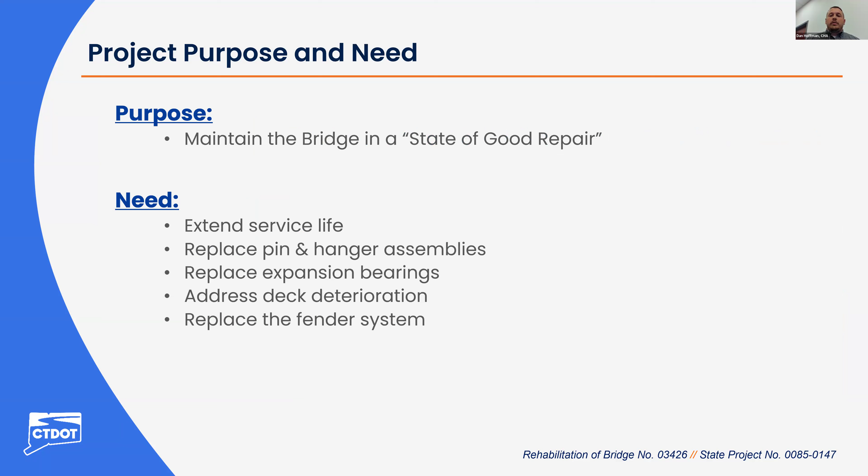So the purpose of this project is to maintain the bridge in a state of good repair. The project needs include extending the service life, replacing the pin and hanger assemblies, replacing the expansion bearings, addressing deck deterioration, and replacing the fender system.

The bridge for the project location, bridge number 03426, the Mohegan-Pequot Bridge, carries Route 2A eastbound and westbound over the New England Central Railroad, P&W Railroad, and the Thames River in Montville and Preston. The bridge carries one lane of traffic in each direction between Route 32 on the Montville side and Route 12 on the Preston side. Mohegan Sun Casino is located just to the northwest of the bridge.

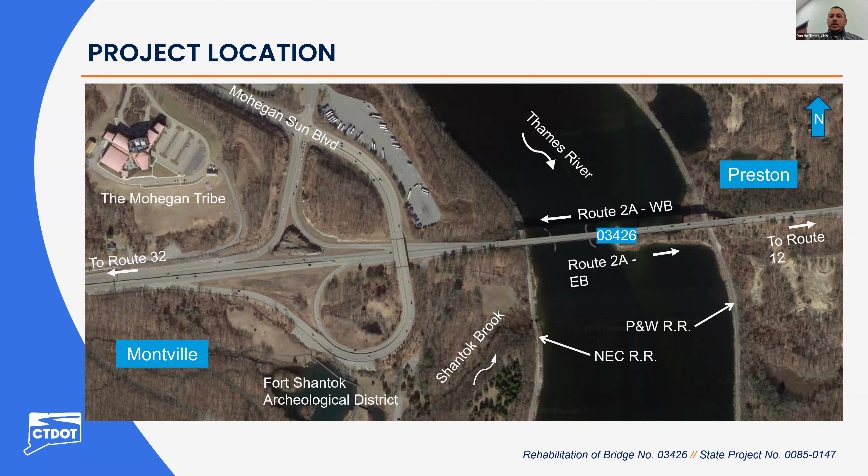The bridge was built in 1967. In 1985, the pin and hanger assemblies were retrofitted with emergency bearing supports. In 1996, a rehabilitation was performed, which included full blast clean and paint, new protective fence, new light standards, and repairs to the substructure. In 2010, the strip seal expansion joints were replaced with asphaltic plugs, and some deck patching was performed within those limits.

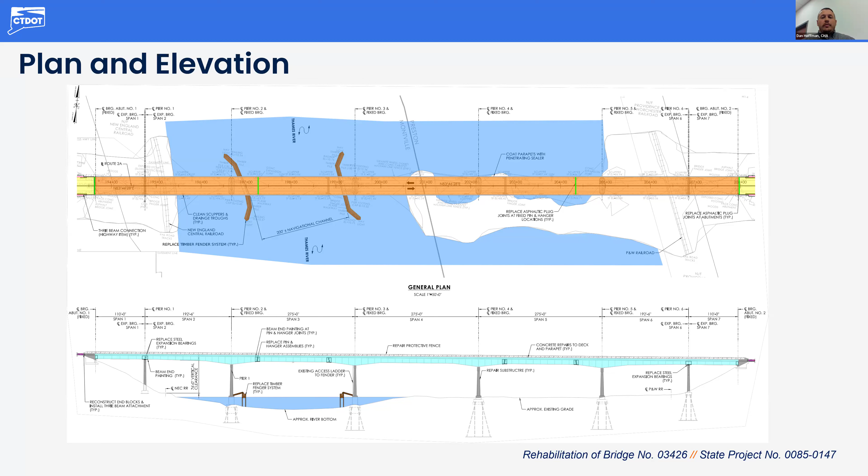So here's a colored plan and elevation view of the Mohegan-Pequot Bridge. The bridge is a 7-span structure comprised of a concrete deck supported by 4 welded steel plate girders. It is approximately 1,434 feet long. Spans 1 and 7 are simple spans. Spans 2 through 6 are continuous over the piers. The pin and hangers are in spans 3 and 5. The navigation channel is located between piers 2 and 3 and protected with a timber fender system.

This view shows a cross-section of the bridge. Route 2A carries a single lane of traffic in each direction. Each lane is 12 feet wide with 8-foot shoulders throughout the length of the bridge. The bridge has a curb-to-curb width of 40 feet and an overall out-to-out width of 43 feet 6 inches.

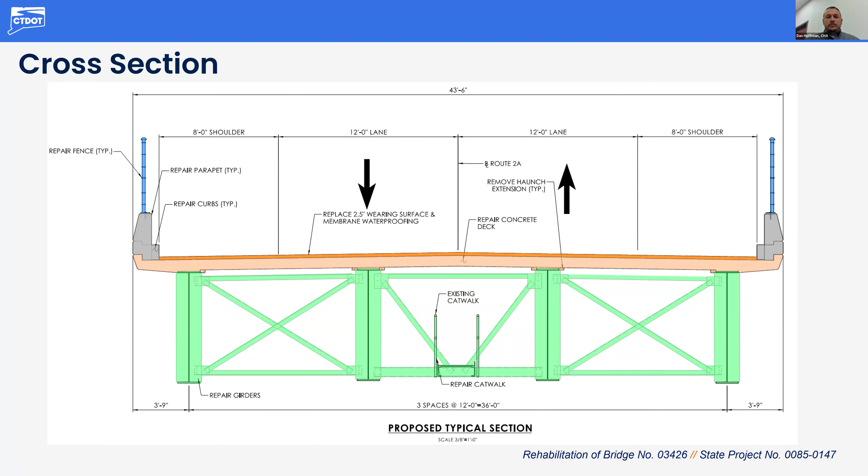So before getting into the existing conditions, I thought it'd be helpful to note how condition ratings are determined and the purpose of them. So per the Connecticut Bridge Inspection Manual, condition rating is a judgment of a bridge component condition in comparison to its original as-built condition, and it's used to provide an overall characterization of the general condition of the component being rated. So condition ratings are assigned a numerical value, each indicating a different condition as shown in the table.

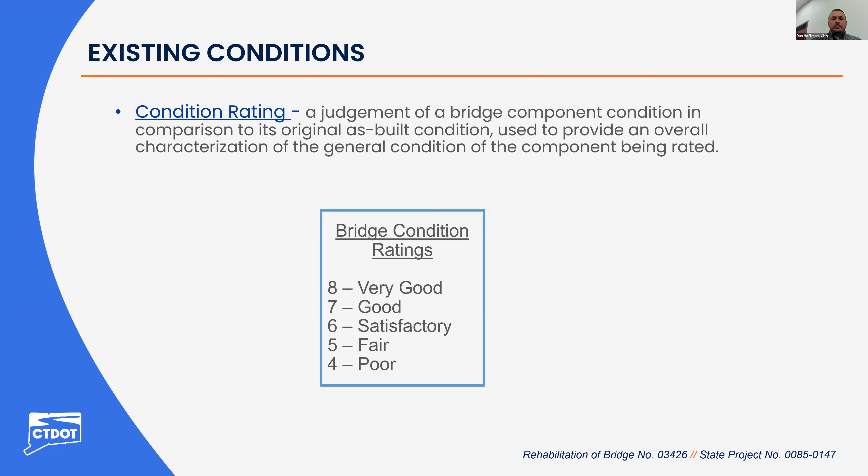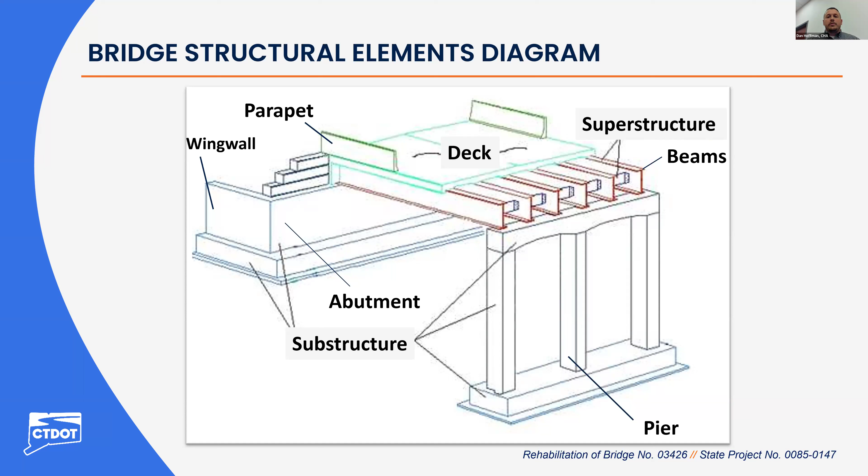And also to help clarify the elements of the bridge, we have included this graphic. So the deck is the surface that you drive on. The parapets are the safety barriers on the edge of the deck. The deck is supported by beams, and this makes up the superstructure of the bridge. The substructure is what supports the superstructure from below. This consists of abutments with wing walls at the ends of the bridge and piers located as needed to provide intermediate supports.

So next, I'll go over the existing conditions of the Mohegan-Pequot Bridge. So for the deck, overall, the deck is noted to be in fair condition. The underside of the deck exhibits spalls with exposed rebar, hollow areas, and cracking. The underside of the deck is approximately 13% deterioration per the inspection report. A ground penetrating radar, GPR, evaluation was performed by Infrasense, which shows approximately 20% of the deck deterioration.

Existing deck joints are in fair condition. There are deck joints at abutments 1 and 2, piers 1 and 6, and at the pin and hangers within spans 3 and 5. Asphaltic plug joints are located at both abutments and were replaced in 2021 when the bridge was last paved and have no noticeable deficiencies. The joints at the fixed pin and hangers in spans 3 and 5 are pourable joint seals with elastomeric headers installed in 2015. These joints are slightly depressed and have random hairline cracks in the elastomeric headers.

Steel finger joints are located at piers 1 and 6 and at the expansion pin and hangers in spans 3 and 5 and are original to the structure. There are hairline cracks in the concrete headers, vertical misalignment between the joint fingers up to 3/8 of an inch, and some section loss in the joint fingers at the curb line. The vertical joint plates at the ends of the deck have some laminated rust and section loss.

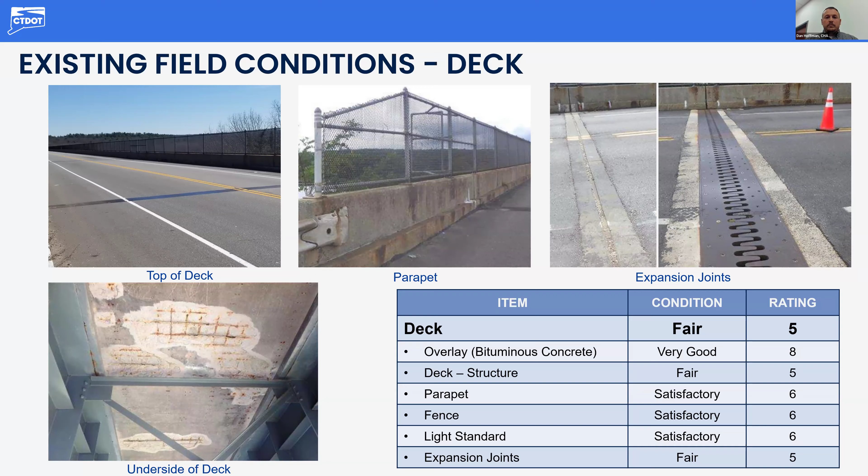So for the approaches, overall, the approaches are in very good condition. There are no approach slabs per the existing plans. The approach guide rail exhibits some random impact damage and bent or twisted posts. All approach guide rail and bridge attachments appear to meet RI or RB standards. The guide rail and bridge attachments do not meet the latest ConnDOT standards and are not MASH compliant.

For the superstructure, overall, the superstructure is in fair condition. The bearings are in poor condition. The bearings consist of steel fixed and expansion rocker bearings. Expansion rocker bearings at piers 1 and 6 exhibit painted over pitting with reoccurring laminated rust, pack rust between bearing components, and up to 75% section loss in anchor bolt nuts. Some bearings are overexpanded while some bearings are overcontracted.

Fixed bearings at the abutments and piers 2 through 5 exhibit pack rust between sole plates and girder bottom flanges, and up to 20% section loss in anchor bolt nuts, mainly at the abutments. Pot bearings are present at the pin and hanger emergency bearing support locations.

The girders are in fair condition, with the paint being in good condition. The girders exhibit less than 5% paint deterioration, isolated areas of painted over steel section loss. The pin and hangers are located in spans 3 and 5. The hangers have scattered pitting up to 1/8 inch deep. The control plates have up to 3/16 inch deep section loss and are typically bowed from pack rust between the girder webs and/or the elastomeric spacers. At isolated locations, the control plates are in contact with the web or loose with abrasion rust.

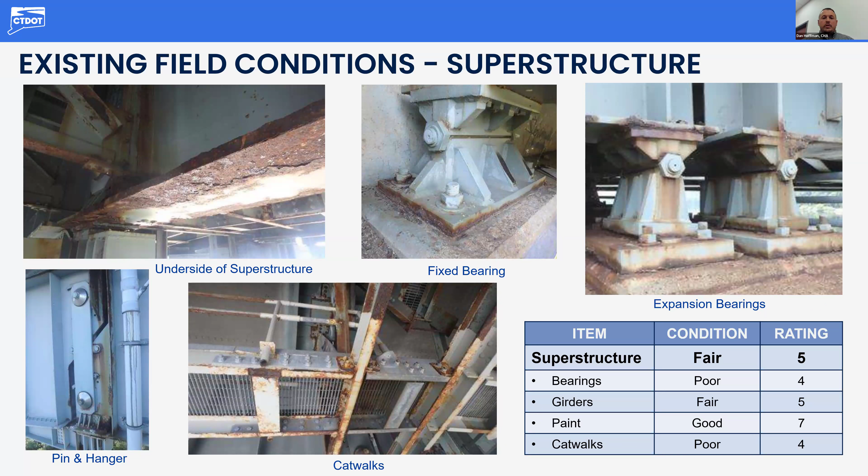So for the substructure, overall the substructure is in satisfactory condition. The substructure consists of reinforced concrete abutments and piers with stone masonry facing on the footing caps of the river piers. The concrete abutments exhibit hairline cracks, hollow areas, and spalls. The pier columns have random vertical and hairline cracks with isolated efflorescence and rust. Pier columns have isolated locations with hollow areas.

The pier caps have random vertical and hairline map cracks with isolated efflorescence. Pier caps have scattered concrete patches with hollow areas on the underside up to full length and width at piers 1 and 6. Underwater, the stone masonry facades have isolated areas of mortar loss.

Erosion is rated a 5 due to erosion in front of abutment 2 along the slope. It's up to 3 feet deep with exposed footing up to 1 foot high. That's at abutment 2. Areas of erosion are also present along the wing walls, up to 10 feet long, 3 feet wide, and 1 foot deep. Scour is rated a 6 with channel bottom areas of aggradation and degradation at the piers between inspections.

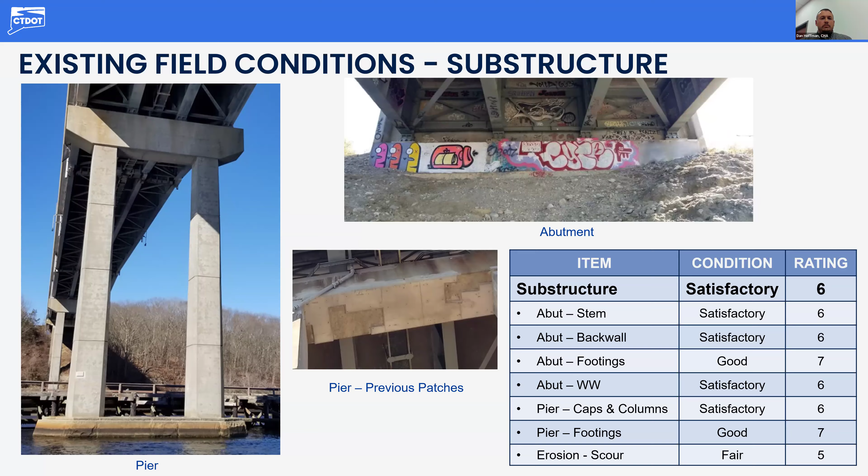So for the channel and channel protection, overall, the channel and channel protection is in fair condition. This is mostly driven by the fender system condition. There are areas of aggradation and areas of degradation within the channel between inspection reports. Piers 2 and 3 have portions of the footing exposed intermittently up to 4.7 feet high around the perimeter. However, the underwater concrete portion of the footing extends an additional 14 feet below the bottom of footing area.

So the existing fender system is in poor condition. The fender system is located alongside piers 2 and 3 on either side of the navigation channel. Deteriorations include loose or missing connection hardware, heavy checking and splits, severe rot, section losses, and teredo damage to the piles.

So as I stated before, the purpose of this project is to maintain a state of good repair. The project needs include extending the service life, replacing the pin and hanger assemblies, replacing expansion bearings, addressing deck deterioration, and replacing the fender system.

So the major scope of work items include repairs to the structural steel members, including the catwalks, replacing the pin and hanger assemblies with stainless steel components and non-metallic bushings, replacing the wearing surface and membrane waterproofing, replacing the asphaltic plug joints and the joints at the fixed pin and hangers, repairing the concrete deck, parapets, and curbs, removing the haunch extensions over the railroad and waterway,

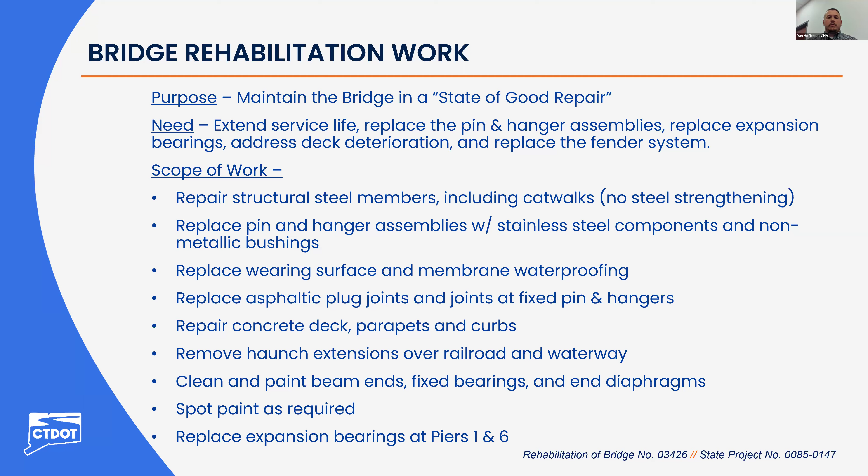cleaning and painting beam ends, the fixed bearings and end diaphragms, spot painting as required elsewhere, replacing the expansion bearings at piers 1 and 6, repairing the concrete substructure, replacing the fender system with a timber replacement, installing slope protection to address the erosion at abutment 2, upgrading the end block transitions to be MASH compliant with MASH compliant guide rail attachments, partial replacement of the approach guide rail and curbing, some minor full depth shoulder reconstruction and approach

milling and overlay, repairing the fence on the parapets and replacing the fence fabric over the railroads, fixing broken weep pipes, extending some weep pipes, cleaning drainage scuppers and removing vegetation from drainage troughs, replacing cracked missing junction box covers and light standard handhole covers, applying a penetrating sealer to the concrete surfaces, and cleaning graffiti.

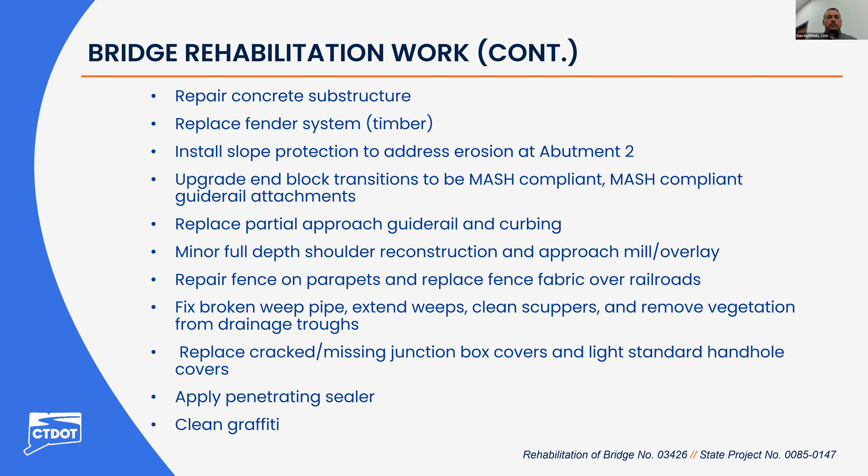So next I'll discuss some additional information on the existing condition and some of the proposed repairs of a few of the scope items. So the existing steel girders are in fair condition, exhibiting deterioration, including peeling paint, light to moderate rust, laminated rust, and section loss. So proposed would be steel repair plates. There are currently approximately 20 areas of concern that would require steel repairs, not counting the catwalk. This is on the girders. Repairs will include web and stiffener and bottom flange repairs, and also required other repairs to the existing catwalk.

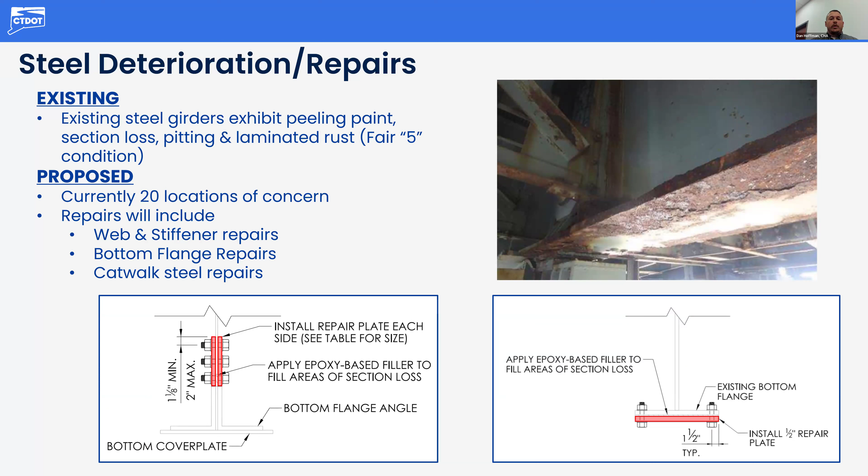So the existing expansion bearings. The existing expansion rocker bearings at piers 1 and 6 exhibit painted over pitting up to 1/4 inch with recurring laminated rust, pack rust up to 3/8 inch between bearing components, and up to 75% section loss on the anchor bolt nuts. Some bearings are overexpanded and some bearings are overcontracted. So proposed will be to replace the steel expansion bearings with high load multi-rotational disc bearings. This will require jacking up the girders to remove the existing bearings and then installing the new bearings.

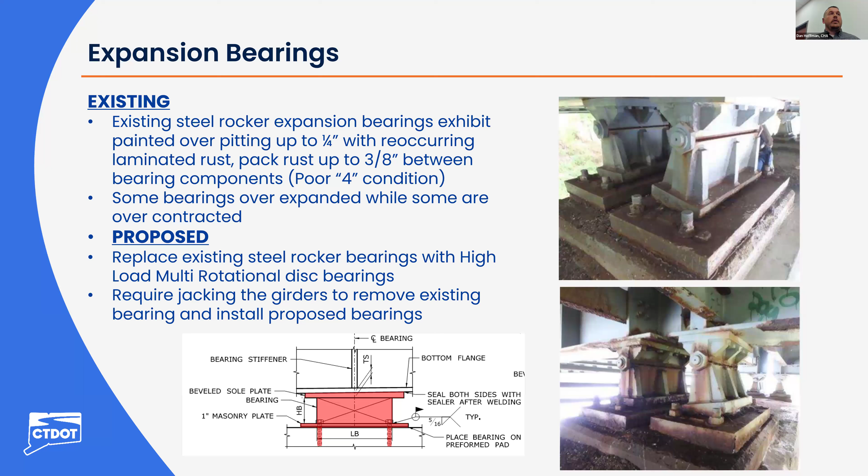So the pin and hanger assemblies, located in spans 3 and 5. The hangers have scattered pitting up to 1/8 inch depth. Control plates have up to 3/16 deep section loss and are typically bowed up to 3/4 inch with pack rust between the girder webs and or elastomeric spacers. At isolated locations, the control plates are in contact with the web or loose with abrasion rust. So the proposed condition will be replacing the pin and hanger assemblies with stainless steel components, as well as non-metallic bushings.

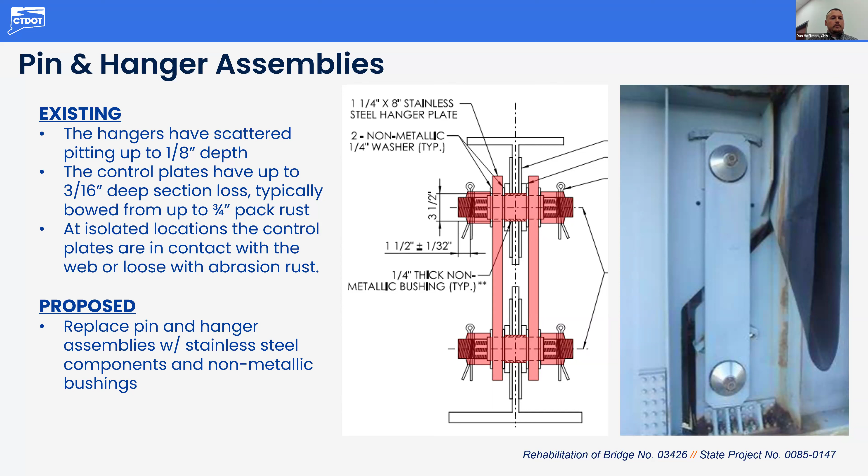So as I noted before, the existing fender system's in poor condition. The fender system is located alongside piers 2 and 3. Deterioration includes loose or missing connection hardware, heavy checking and splits, severe rot, section loss, and teredo damage to the piles. The proposed will be a replacement timber fender system. It will be designed to current AASHTO design collision loading. It is anticipated that the existing channel width will remain the same.

So quickly touching on highway geometrics at this project site. As you can see, the bridge is fairly heavily traveled with an ADT of around 22,200 vehicles per day. The project will not change any of the highway geometrics.

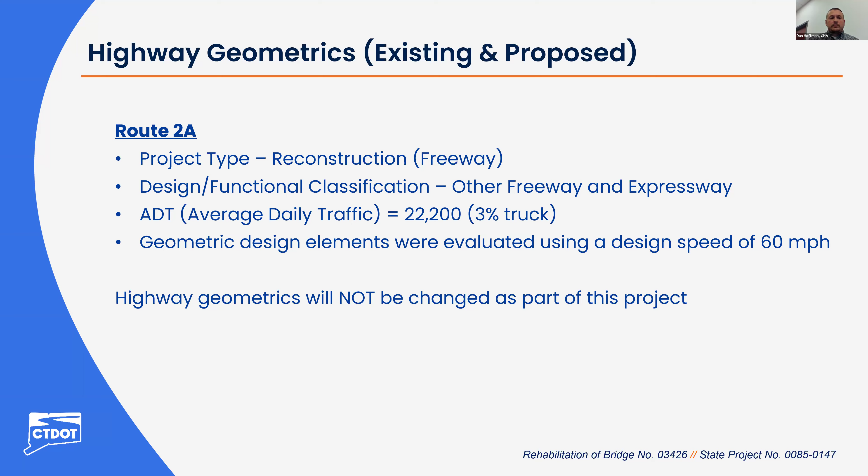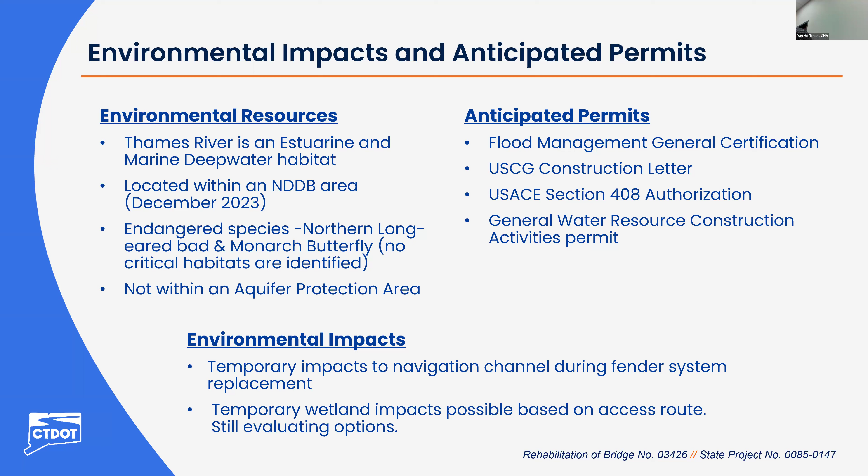So for traffic impacts, maintenance and protection of traffic on the bridge will be used for milling and overlay, repairing the concrete deck, installing the membrane waterproofing and pavement, the joint work, and repairing the parapets and protective fence. This work will be accomplished using temporary lane shifts, stage construction, and shoulder closures. It is anticipated that a portion of the deck repairs and deck joint work will be accomplished using temporary off-peak lane and shoulder closures, utilizing alternating one-way patterns.

There'll be repair work to the piers adjacent to the railroad, as well as repairs to the superstructure above the railroad. No permanent impacts are anticipated with the railroad, and further coordination will be performed. For utilities and rights of way, there's an AT&T fiber optic conduit on the bridge that runs between Pier 1 and Pier 6 and crosses the river. It may require temporary support and or protection during the superstructure work. For rights of way, there's likely temporary easement required for access to abutment 2 on the east side of the river.

For potential laydown locations, we're currently evaluating the location adjacent to the commuter parking lot on Route 12, just north of the intersection with Route 2A. This would be on DOT property. Other areas may be identified and evaluated during final design.

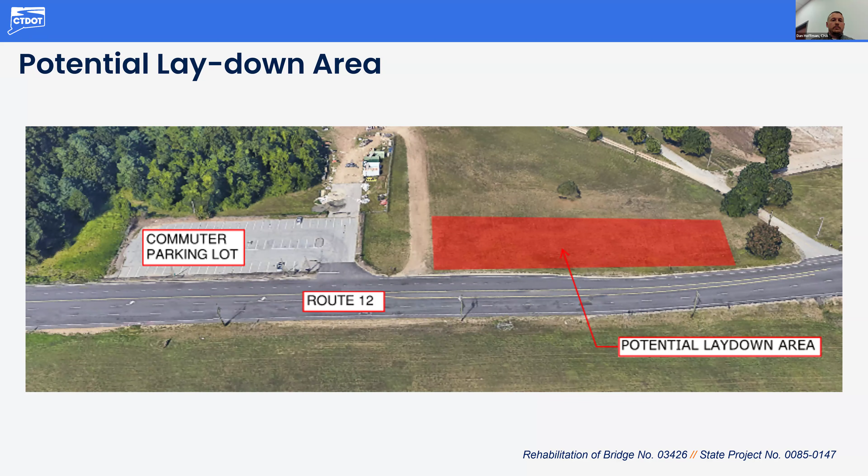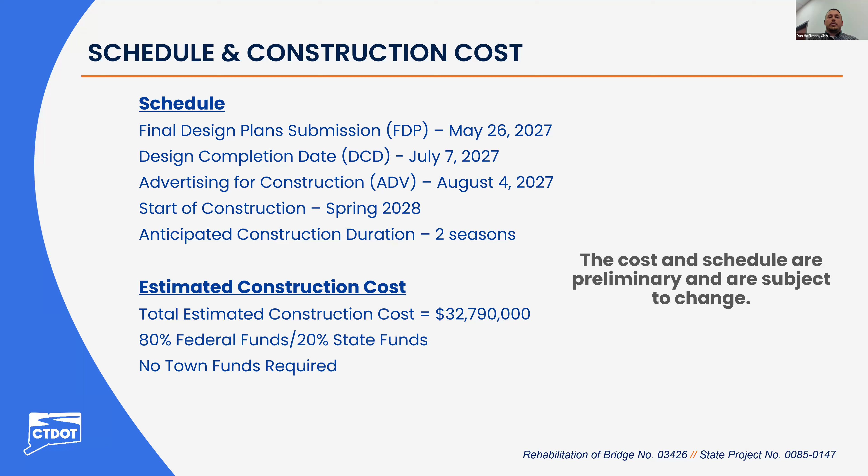This project has an estimated construction cost around $33 million, funded with 80% federal funds and 20% state funds. No town funds are required. Just a note that the cost and schedule are preliminary and are subject to change as design progresses. This concludes my presentation. Turn it over to James.

Want the... Yeah, I minimize that. Okay. So I can still hopefully see it. I have the email too.

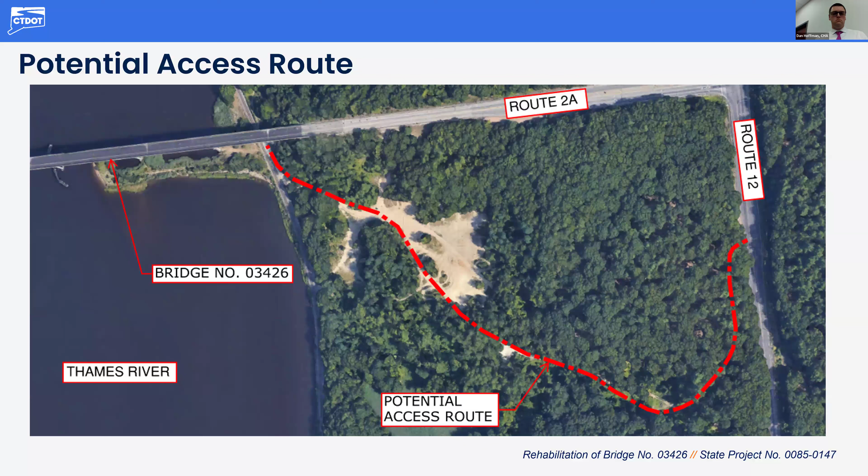Okay. And I get calls all the time on this bridge for its lack of access as a limited access highway, or its lack of access for people either walking or riding bicycles. And I think that as we have taken into consideration on many other areas, that should be taken into consideration here too. People should have an ability to cross the highway in a way that works for them. And we are working in Norwich on a pathway from the Mohegan-Pequot Bridge to the Norwich Marina, a project that is under consideration in the Norwich area.

Now, for people here to understand, I talked with some of you today and brought up these same concerns. And the conversation revolving around a multimodal use of this bridge was that if you put a sidewalk there, there's nothing for it to attach to. But the town of Preston has an actual plan that they're trying to get funding for through a community investment fund or LOTCIP or a number of other projects that would have sidewalks in their village area in Poquetanuck on Route 2A, which is a segue over to Route 2.

So I'm thinking that we're thinking too small, and I was wondering, has anybody talked to the partners that we have with the Mohegan tribe and the Mashantucket Tribal Nation on potential funding, because the number that you had indicated, if a concept such as the one that I have described with expanding the entire span with 4-lane traffic, 2 on each side, and adding in an ability for bikes and people to walk across, that would be in the $200 million range.

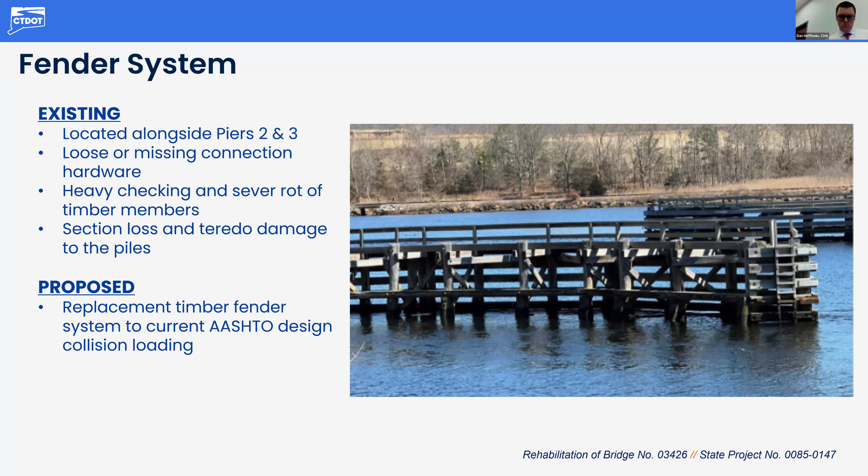And just to let you know, after that incident, the state did go and check all of our major bridges in navigational waterways, and we did not identify an immediate threat. But we will continue to look into all individual bridges to improve the conditions. But again, on the analysis side, it's based on probability. So that's in the design code. I asked two questions and I promised to shut up.

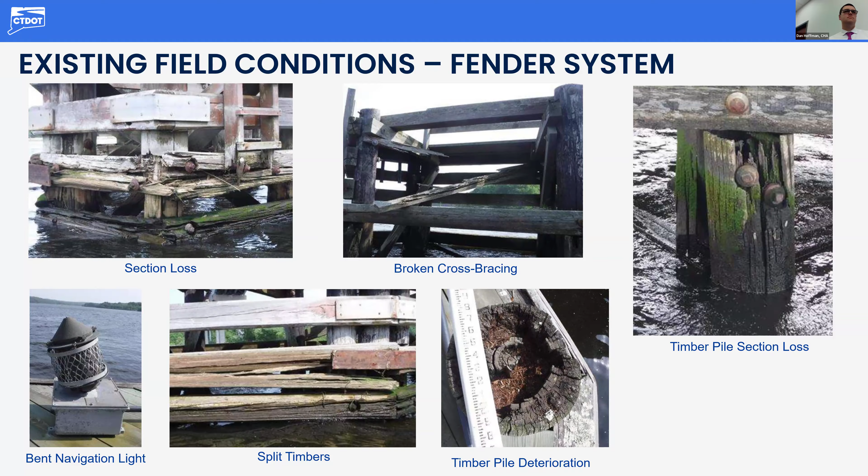No, go on. I heard scour system and it was in fair condition. Where's the scour system located? Is that the base of the support structure for the bridge? Yeah, so the piers are supported on piles that are driven down to bedrock. Then there's a thickness of the footing cap, which the piles extend up into. Below that, there's 14 feet deep of concrete, called underwater concrete, that surrounds the piles. So the channel has exposed the top portion of the footing over the years. It changes as it goes. But based on the depth that's still there, it doesn't actually reduce your pile fixity conditions.

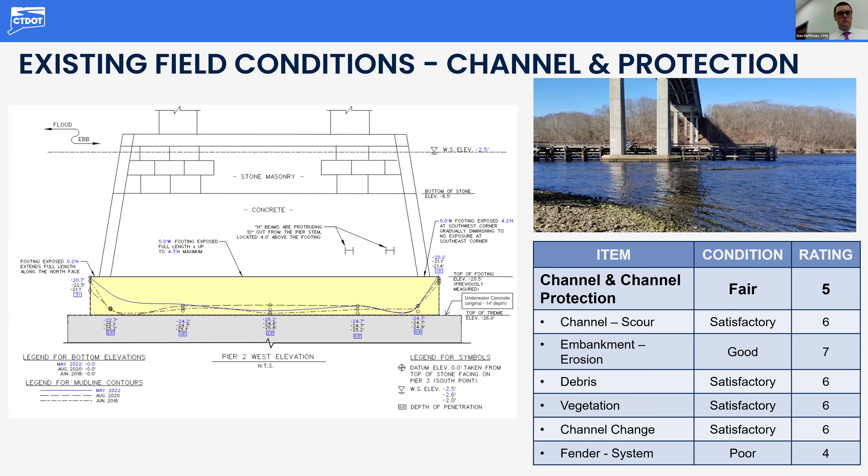There's recent studies underway having to do with guardrails not being able to stop EVs because of their weight. Are we considering reinforcing the guardrails along this bridge, or more importantly, if we actually look to widen the bridge, it gives us an opportunity to take that into consideration. Expand it. So currently, no.

We're currently designing all roadside barriers to MASH criteria, which is, FHWA does a bunch of testing. They come out, that becomes the standard. I have heard numerous times about the EVs and the loadings, but we're really kind of bound to the FHWA standards. So as that stuff begins to evolve and come out, it will be.

Appreciate it. Before I get to you, could I just answer some online questions quickly? So we have 3 online questions. One was asking about an SBE set aside for this project. For the design phase, there is no SBE set aside. There's a 9% DBE set aside. And then for the construction phase, we have not gotten to the point of determination for how much that set aside is going to be.

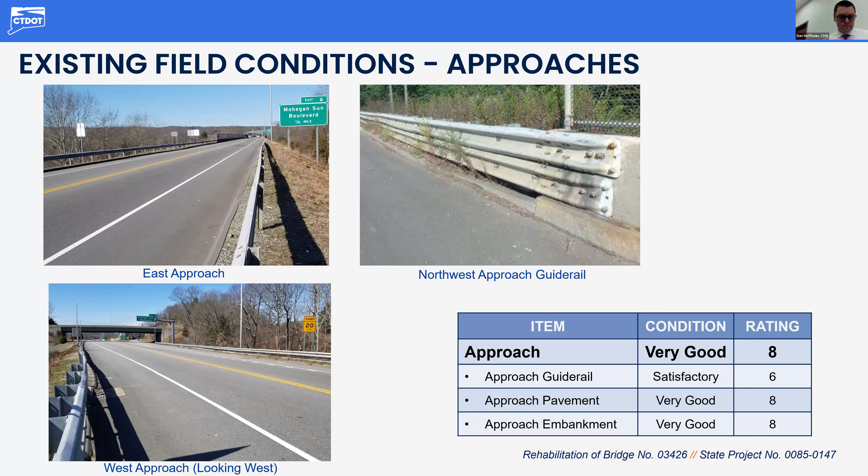Do you want to talk more to that? Yeah. We're looking at off-peak. Maintaining the 2 existing lanes for all the peak hours, and then off-peak, we would come in and reduce that to one-way alternating traffic in order to work on a portion of the center of the bridge. But that would be off-peak, which is nighttime and weekend hours, which are really determined by the traffic counts. Did that answer the question? Yeah.

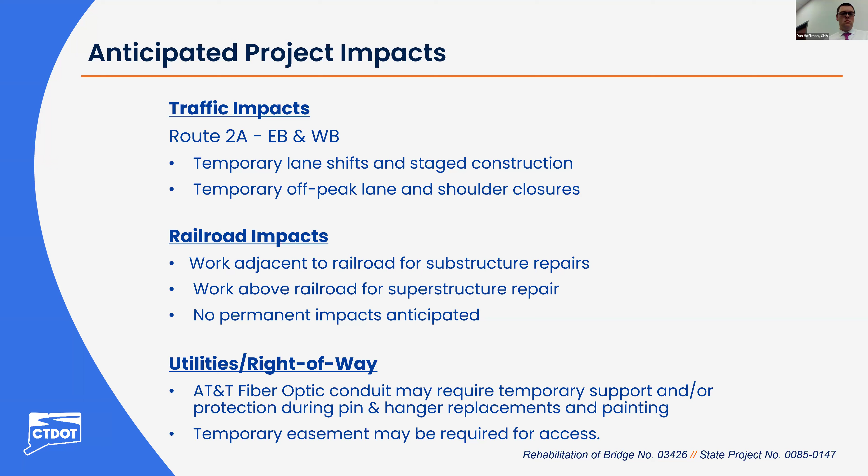Okay. Your question? Yep, so to start, my name is Kevin Blacker. I'm a resident of Noank. I have an interest in shipping on the Thames. My first question is, everybody else in the room might know, but I don't know. I was hoping to know who the previous speakers were and what their positions were, because I think that really has merit on the questions that were asked. Would the previous speakers be willing to just identify themselves?

Michael Johnson, Tribal Historic Preservation Office for the Mohegan-Pequot tribe. Derell Wilson, the representative of the 46th District, which is Cathy Osten, State Senator, Marlborough, Hebron, Lebanon, Columbia, Sprague, Franklin, Norwich, Lisbon, Ledyard, part of Montville, and the 2 tribal reservations sit in the confines of my district. Montville Mayor.

Thanks. So I think that the previous speakers raised a bunch of really good points. The homeland security and the fear of something happening down at the Gold Star, such as the oil spill or the accident down in Maryland, and its potential to really snarl traffic, and then have us as a region rely on this bridge as a backup. I think that the vessel strike that was brought up by the gentleman here is a very, very good point.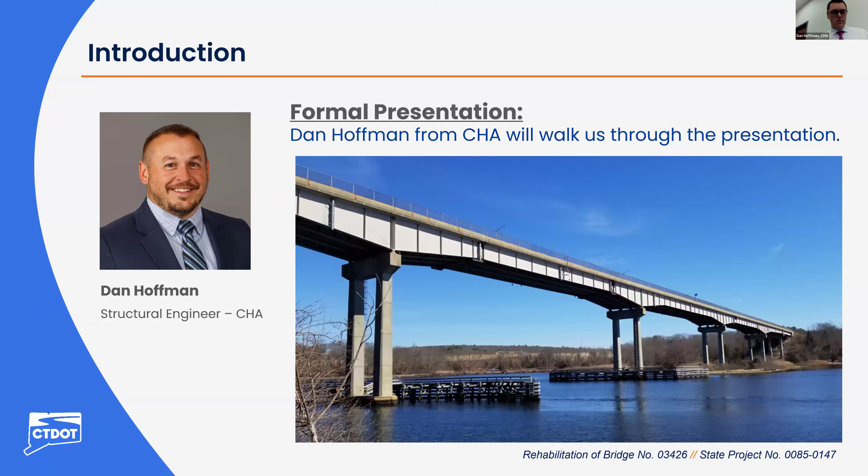Oh, and the abutments, they say they're gonna replace that in kind, like it is, wood. As of right now, the abutments on the bridge we're not replacing at all. The current scope we presented today, we would be replacing the fender system. Yeah, so these wood fenders we would be replacing basically in kind, in the same profile where they are. So the actual navigable channel width will not change. And the vertical clearance to the bottom of the bridge, we're not adjusting that right now.

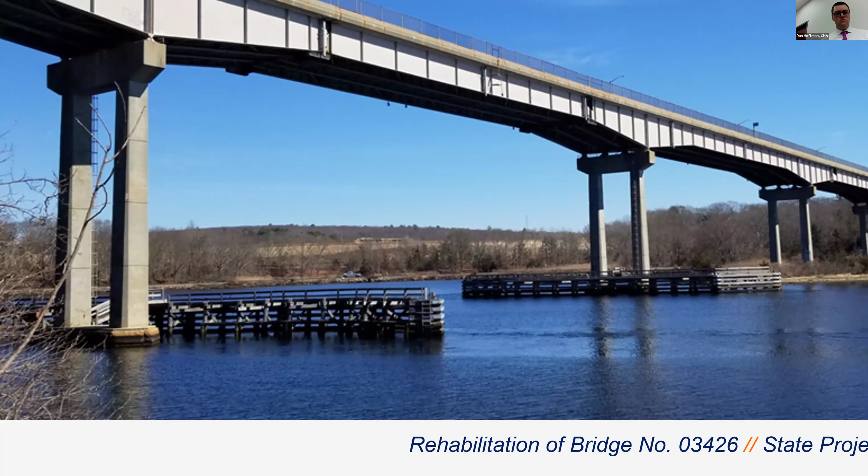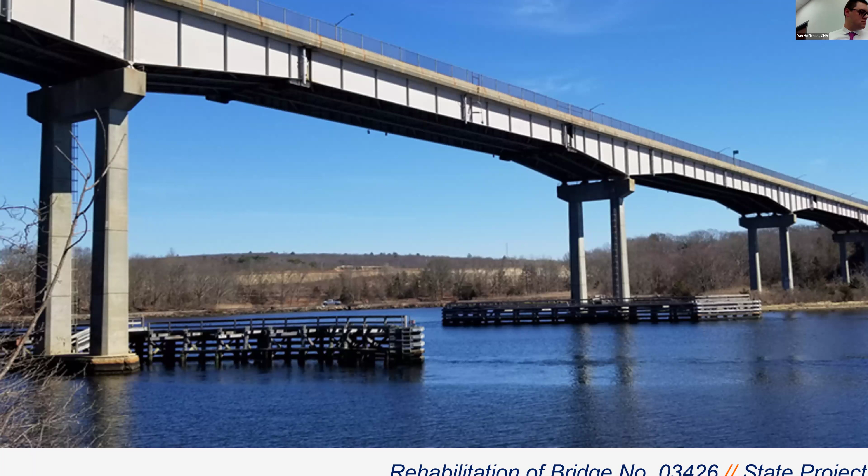See it higher. They can do it, but I'm sure they're not gonna do that. Yeah, the big issue with raising a bridge is the impact on all the approach roadways. That ends up tracing it all the way back. Can't believe they did the Bayonne Bridge for the Panamax ships to get in there. Anyway, but we're definitely not lowering it. No, good. That sounds good. The Coast Guard would be all over us. They do not like that.

I was bringing two barges down the river, bringing stone over to Long Island. I had to leave at night from Norwich in order to get slack water at Plum Gut, because that current really runs and I had two barges. But, yeah, the buoys are lit up there.

I had to spot them and everything, you know. But I'm surprised if they would replace that with wood, because now they use this high density polyethylene. Yep, very nice stuff. It's got a strengthened member inside. They did the London Bridge. Yeah, we looked at both alternatives. We chose the wood alternative.

Dan Drainville from The Day newspaper in New London. Just kind of jumping off some of the other points that were made, I was curious if the bridge widening had ever been considered at any point. I mean, you could argue that it is something that relates to safety issues. I understand that the strategy here is to replace core components of the bridge. But if that's the case, then at what point would the DOT consider that, and what would it take to see a project like that begin?